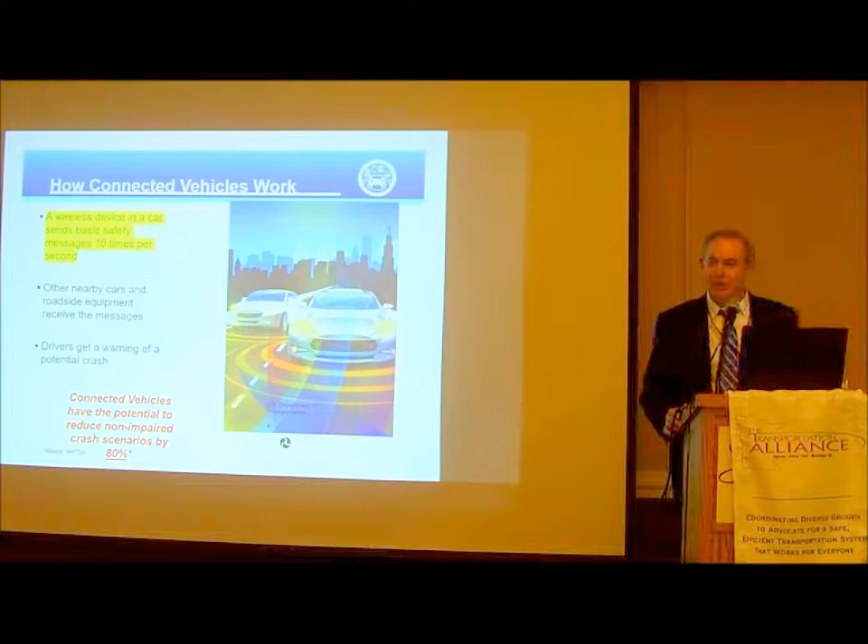They put up barriers so you can't see the car and ask us to drive to an intersection, keep our foot on the gas. And there's the car coming the other way, and my car could stop. So it's a pretty amazing technology. So that's what the connected vehicle pilots are testing, is that part of the system.

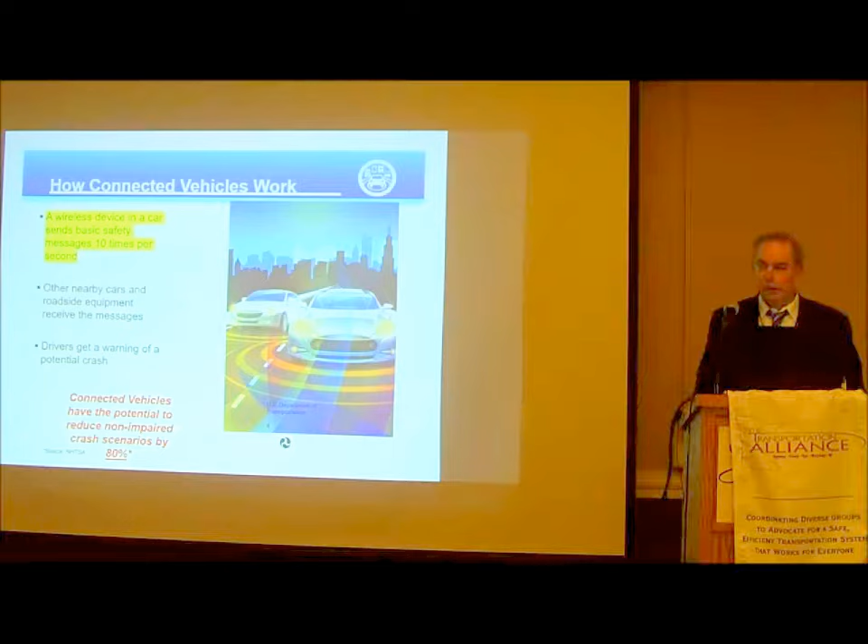The autonomous is happening through the industry. Connected is a coalition of auto manufacturers and the government's agencies developing the technology. And there is an organization called CAMP, which is our partner with the automakers to do that.

So I'm going to show you a short video because it would almost take me all the rest of the day to explain all these technologies. So I'm going to show you a couple. In the connected vehicle program, a lot of what we've done on the test tracks in the labs is test applications. Think of your phone being the car; the applications on your phone are the stuff we're testing. And that's what the pilots are testing, is these applications.

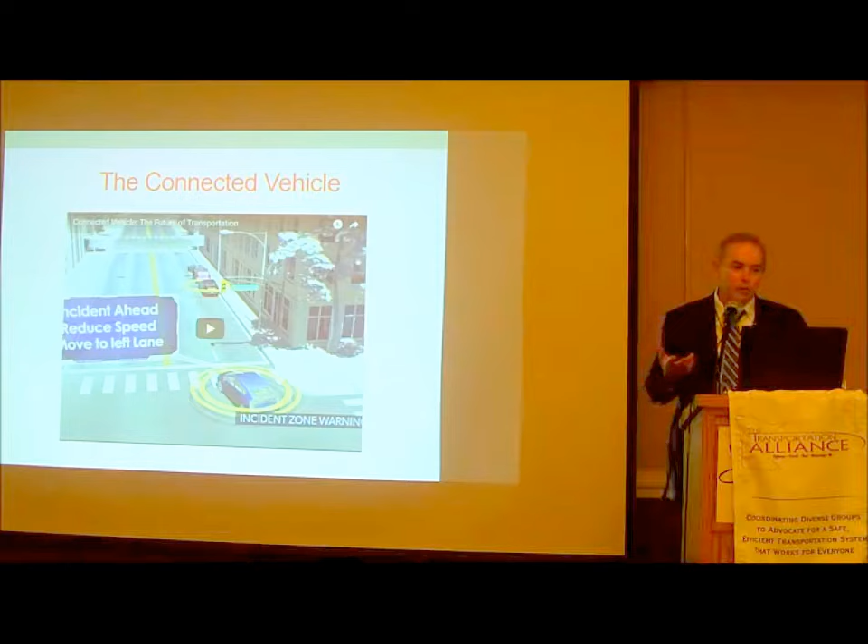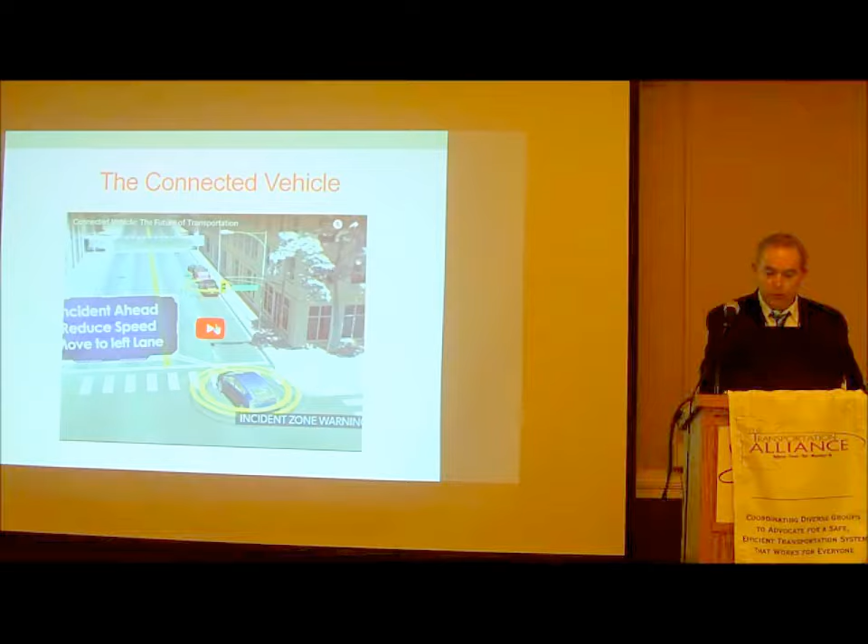Imagine a future where vehicles talk to one another and to critical infrastructure. This connected vehicle technology can change our transportation system as we know it by enabling safe, interoperable, networked wireless communications among vehicles, infrastructure, and personal communications devices. Connected vehicles provide drivers with 360-degree awareness of similarly equipped vehicles within a range of approximately 300 meters. This secure system keeps personal information private and does not track your vehicle.

Drivers will receive warnings that inform them of potential hazards through a visual display, seat vibration, or tone. These are only warnings. The driver remains in control of the vehicle at all times. However, the technology can also support limited automated functions in which the driver cedes partial control of the vehicle. Warnings can help drivers respond quickly to avoid potential crashes. For example, the Intersection Movement Assist application warns drivers when it is unsafe to enter an intersection. The Do Not Pass application warns drivers when it is not safe to pass a slower moving vehicle.

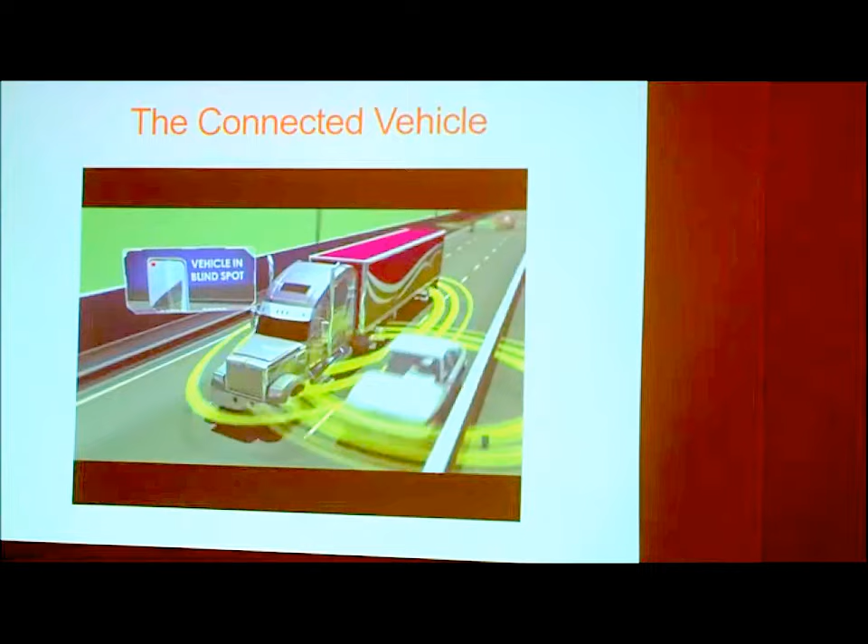The Emergency Electronic Brake Light application notifies the driver when an out-of-sight vehicle several cars ahead is braking. And imagine the value of this blind spot warning application, which lets this commercial driver virtually see what's happening in his or her blind spot. Connected vehicles can communicate with smart roadside infrastructure like rail-grade crossings to alert drivers when a train is coming, even if the driver cannot see or hear the approaching train.

Connected vehicles can help with weather-related traffic and safety issues too. This is especially true with conditions such as black ice, where the weather may not appear to be dangerous, but the roads are slippery. Information collected from multiple connected vehicles can help determine when a potential hazard exists, such as icy roads, and warn drivers before they experience them.

Road weather data from the vehicles can be sent to traffic management centers, or TMCs, providing detailed, real-time information to help monitor and manage transportation system performance. The centers can then take actions like adjusting traffic signals and speed limits, notifying maintenance crews, dispatching maintenance vehicles to the road, and broadcasting warnings for motorists. Motorists can get real-time road weather information from in-car displays, by dialing 511, or by listening to highway radio stations. Motorists will be able to get road weather information on their personal devices before leaving home.

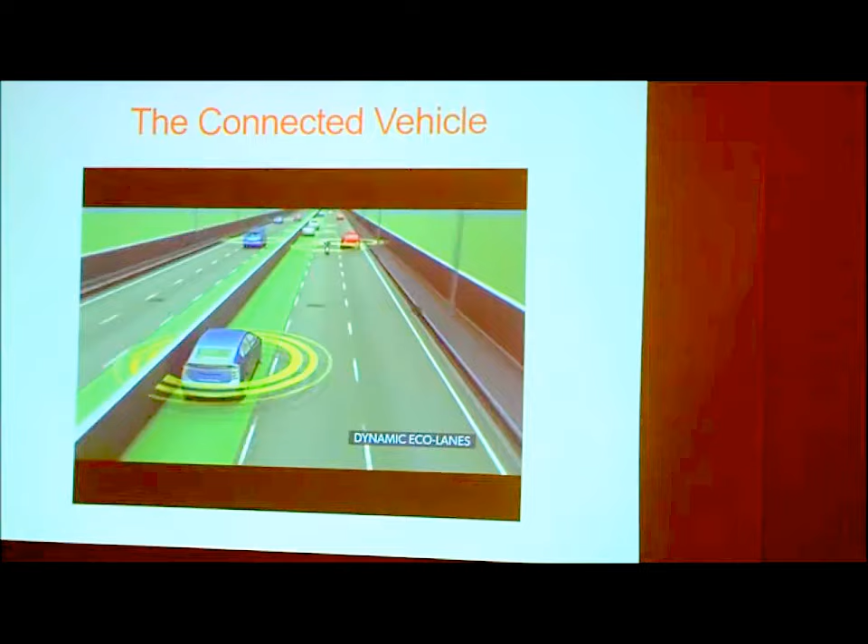Connected vehicles can even help us to reduce our carbon footprint and facilitate green transportation choices. Eco lanes are similar to today's HOV lanes, but with a big difference. Motorists in these lanes agree to drive eco-friendly vehicles and drive at a speed that conserves fuel. Drivers will be alerted about the proper speed with dynamic message signs.

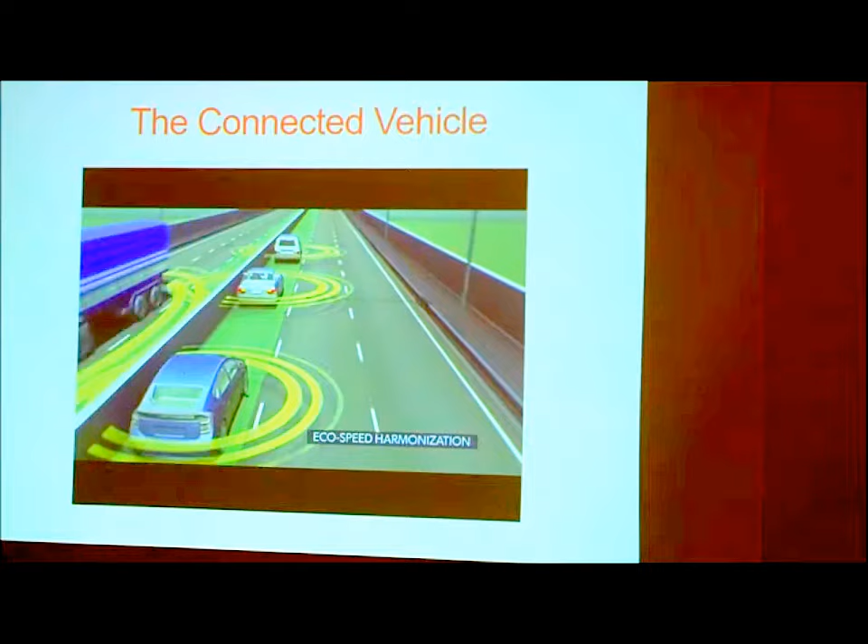Connected vehicle applications can help vehicles to reduce idling and unnecessary stops by communicating with smart traffic signals. Traffic signals broadcast data about their current signal phase and timing, and systems inside the vehicles use the data to determine speed advice for drivers. Drivers could then adjust their vehicle's speed to pass the next traffic signal on green or slow down to a stop in the most eco-friendly manner, thereby saving fuel, reducing emissions, and saving drivers money.

Connected vehicles. All right, I'll cut it off there. There's a number more. I just wanted to show you what some of the applications are that we're testing in the field right now. Many of these will be tested in the pilots we're going to talk about now.

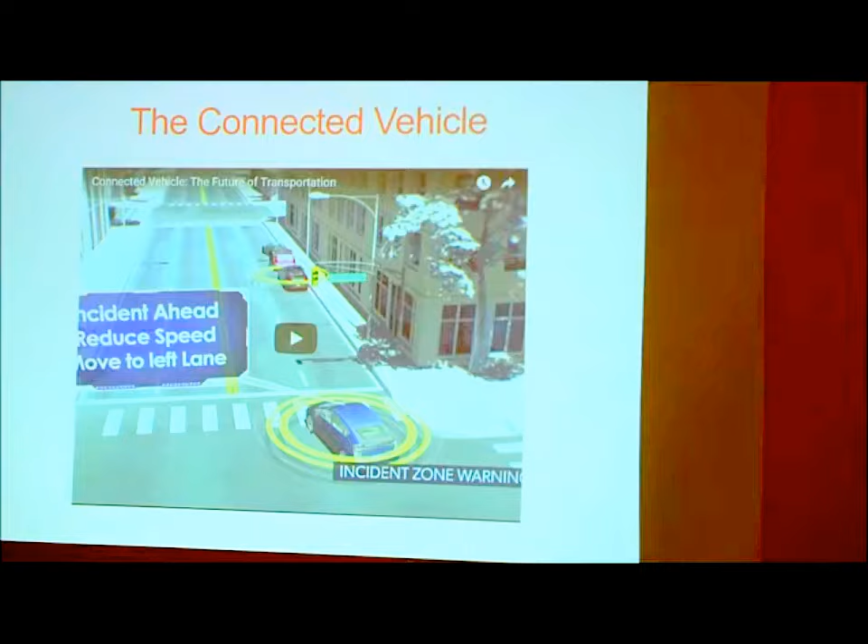So a couple years ago, we did an RFP to do field testing, large-scale field testing. I don't remember the dollar amount there, but it was in the tens of millions of dollars. We wanted to award to agencies or states that wanted to test the technology and demonstrate these applications and learn from doing. So we spent about a year in concept development with the pilots that were selected. That was New York City, state of Wyoming, and Tampa. Actually, I don't have your name written up here, but you'll explain it. It's not a state agency, it's actually a private toll agency that was selected.

So those groups spent about a year and a half once the concept was agreed to between them and US DOT. They spent about a year and a half in design, deployment, and testing, and we're just approaching the turn-on date for those systems. It took us a while to get there, but this is our first effort, and we took kind of a go slow approach to make sure we had it figured out when we put it out in the field. So we're looking forward to that field test and learning from that. I'm going to talk about the Wyoming pilot test, and then the New York City test, and then we'll call up Bob and he will let us know what he's doing down in Tampa.

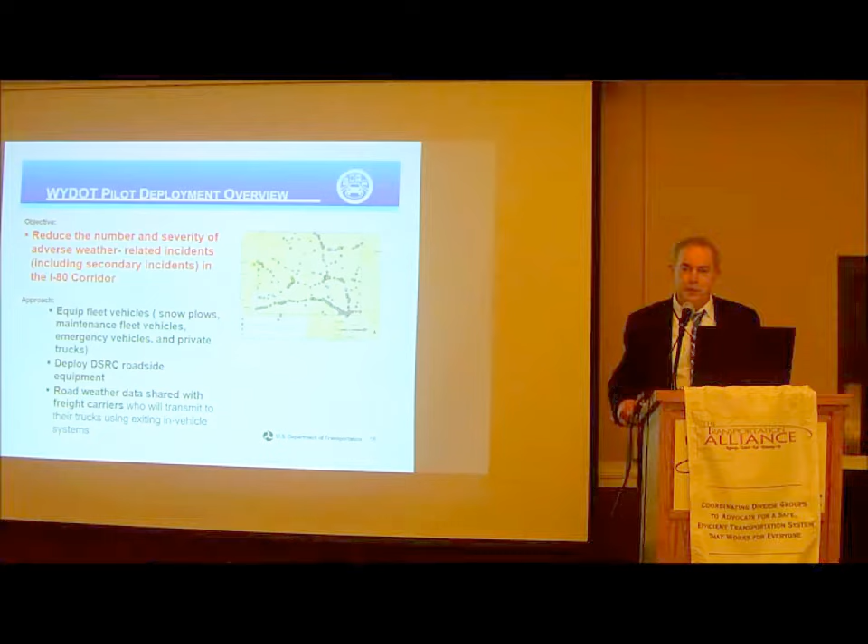They've built it on existing technology, and a lot of this stuff is really just building on existing stuff we're putting out, signal systems. In this case, it's built on weather stations. Just like Minnesota, they have a significant deployment of weather stations, and you see it by the dots in the map. So they're using that as their communication technology to connect back to the center and to each other.

So the objective of the project is to reduce the number of severe crashes that are related to weather on the I-80 corridor.

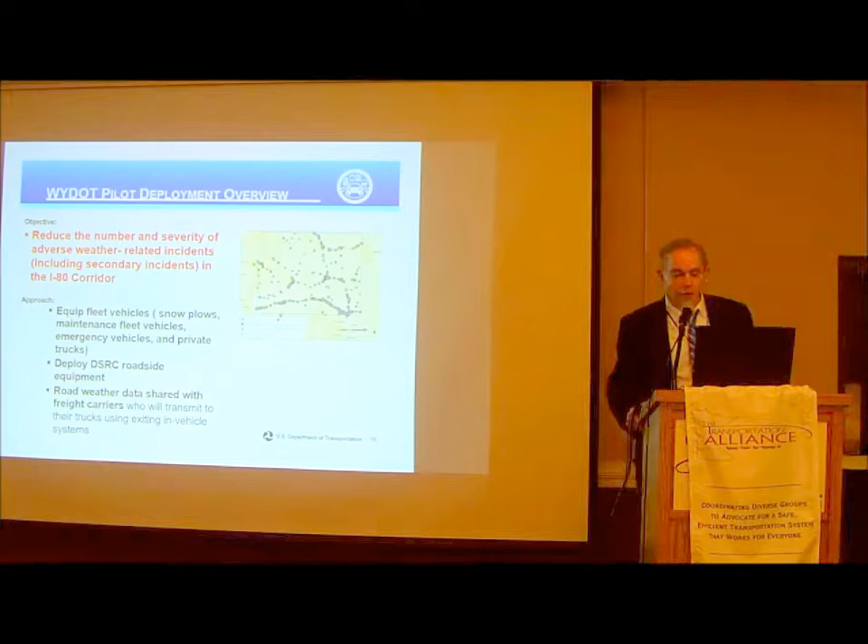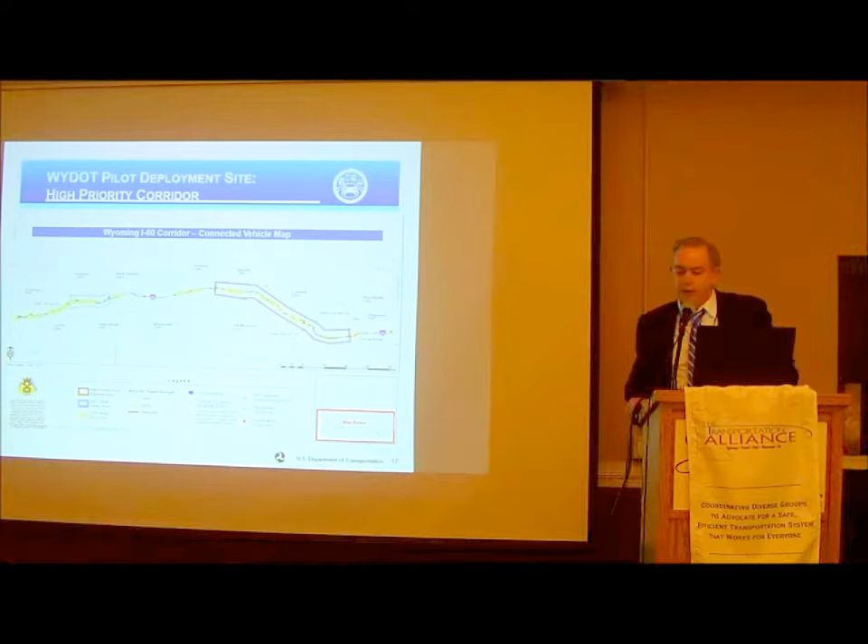So here's the deployment areas. It's all across the state. Some of the testing is just in the areas that are boxed out there, but they will have communication on the whole corridor. And they're just testing 5 of the applications there. Like I said earlier, it's 48 applications, particularly related to weather and warnings for the vehicles.

So, and then on to New York. Much larger project. If you look at the blue boxes up at the top, I'll just kind of go around counterclockwise. 100 vulnerable road user devices. That's either a wearable or a phone that someone's carrying that's going to connect to the system, connect to other vehicles when someone's walking across the road or a bicyclist. So that's the first one.

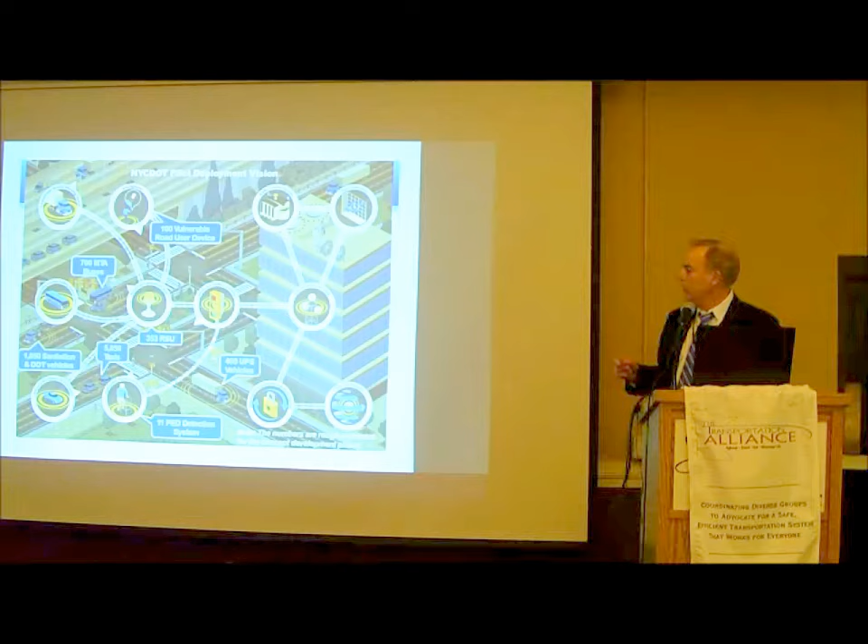And over towards the left, you see 700 MTA buses. All the buses running on the corridors I'm going to show you in a minute will be equipped with radio units so they can communicate with the road system and with people that are around them. For example, a pedestrian that walks in front of the bus, which is typically the typical case of a pedestrian getting hit is they get off the bus and walk in front of the bus and get run over, or the bus turns and runs them over. So very often that the user of the bus is the one getting hit. So they're going to be testing that.

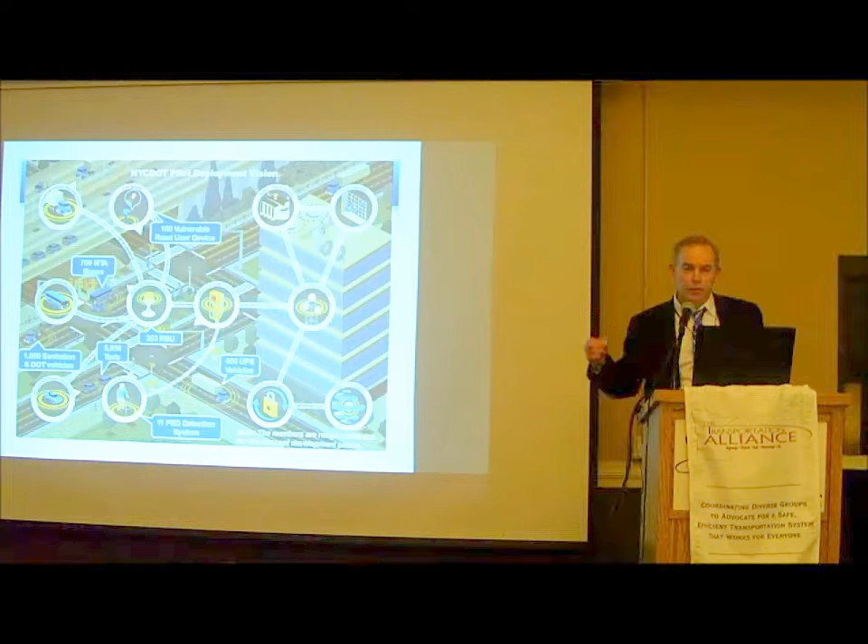Next is 1,000 sanitation DOT vehicles. That's of course New York City DOT. And then 5,850 taxis will be equipped with vehicle technology. And then lastly, 400 UPS vehicles. They will have 350 roadside radios, which you'll see in Bob and Jay's presentation. This is the radio that connects to the traffic signal controller, a very small little device that these cars will be communicating with. So that's their layout.

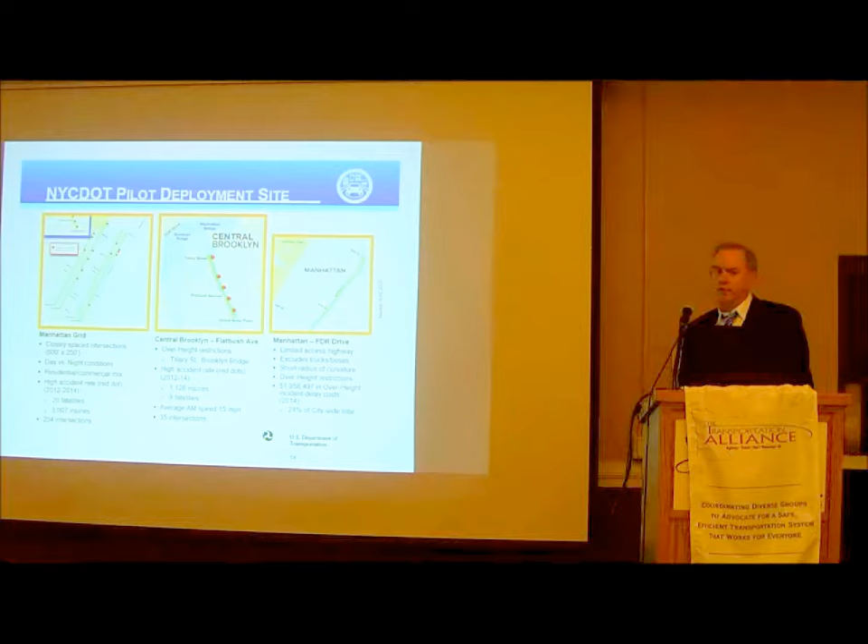And they have quite a few applications on a variety of roads through the Manhattan area. This is kind of hard to see, but on the left, on my right, you see a couple of the avenues in Manhattan, pretty high volume roads. If you've been there, pretty packed with cars, packed with pedestrians, packed with cyclists, packed with transit buses, and a lot of crashes there. They have over the last 3 years, they've had 5,000 injury crashes on these 4 streets, 20 fatalities.

It's a busy place. Then Flatbush Avenue in central Brooklyn, I believe that includes the Brooklyn Bridge also. Again, a very busy street. Average travel speed about 15 miles an hour on that road. You can walk about as fast as, in the morning peak, you can walk about as fast as traffic moves. 35 intersections, 1,000 injuries, 8 fatalities in the last 3 years. They have a real intersection safety problem that they're going to be testing a number of applications to help with.

And lastly, FDR Drive, an old 1930s style freeway, kind of the vision of Robert Moses, one of the few that got built. Very poor geometry, a lot of crashes.

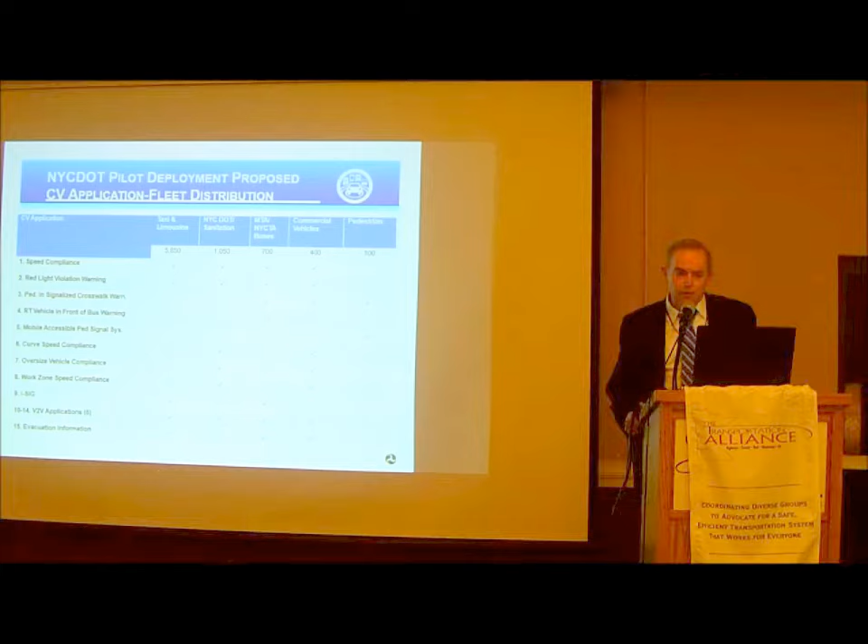So there's a whole bunch of applications - we're not going to read them all. They're testing 15 different applications. At the bottom you see 10 to 14 on that list, which are four or five different vehicle-to-vehicle technology applications, and the first half of the list is primarily intersection safety type applications. So that's a very large-scale test - hundreds of intersections, hundreds of roadside devices will give us a good shakedown of how this technology works.

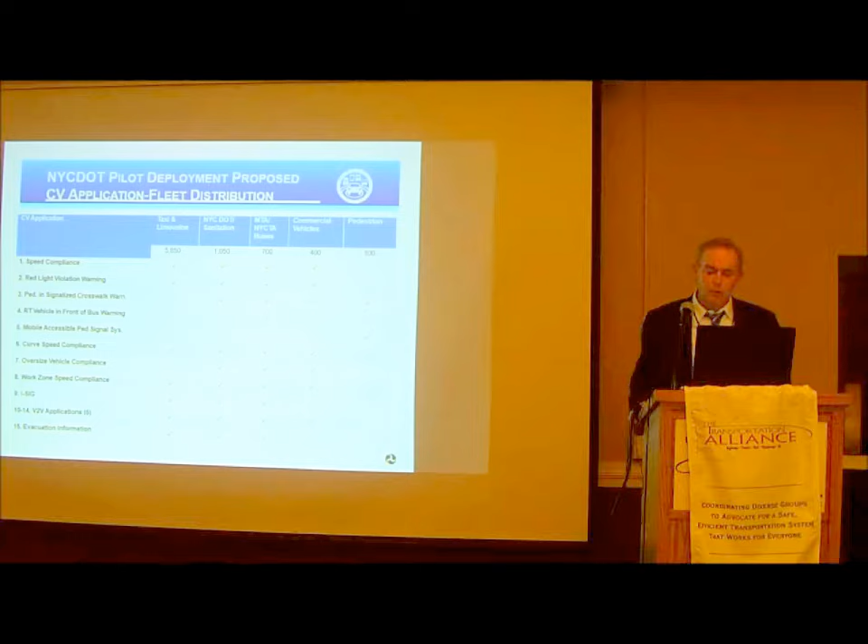So one of the intents, I could say the third intent of this pilot project, was to kickstart this deployment. We hope that all the other people who had applied, it generated enough interest that they would continue to move along. AASHTO felt the same way. We only had enough money to do so many pilots and learn from them, just because of resources and staffing, but a real important part of this was just to jumpstart this whole effort.

So we think the pilots served a very important role in jump-starting this program, and Jay's going to talk about what they're doing locally. That was really important, because the only way this is really going to deploy is if we got people starting to use it and learning from it. We couldn't wait for some special funds to make it happen, so that's pretty exciting to see it happen. AASHTO is a big part of that - I know many are part of AASHTO, and they have what's called the SPaT challenge, which is challenging DOTs to deploy this technology. So that's it.

Are we doing okay on time? Okay, I can take a couple of questions, and we'll probably leave some time at the end for questions also. Yeah, Brian.